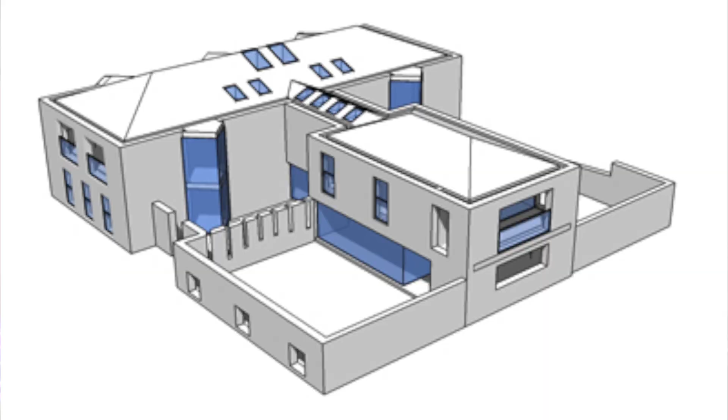I've had several jobs over the years that could have been brilliant if only they'd been built. So why didn't these projects go from the drawing board to the building site? And what can be learned from it? If you are thinking of altering or extending your home or even building a new house, there are some valuable lessons to draw from these projects.

I don't think people want to listen to an architect whining about jobs that never got built, so I'm going to use these projects to give you an insight into how the design and construction process actually works. Each project was different. Some were always going to be difficult, others seemed straightforward, but circumstances changed over time. But in every one of these projects, I had an opportunity to push the boundaries and create a wonderful space for the client and a great advert for my own services.

Now, it's important to keep these two motivations in mind because they are like a chicken and egg. I want to do the best for my clients, but I also want to promote the fact to potential future clients. My business depends on its reputation for creating high-quality projects on challenging sites. Over time, I've built a portfolio of projects which attract new clients looking for something similar, and so the cycle continues. Good work leads to more work.

Think about that if you are considering hiring an architect. If your project has potential to be something special, it can be an extra motivation for that architect. Now, that does not mean they will give you something for nothing. I charge the same fees irrespective of the job's potential for future promotion. You won't get a discount because the design might end up on a magazine cover or win an award.

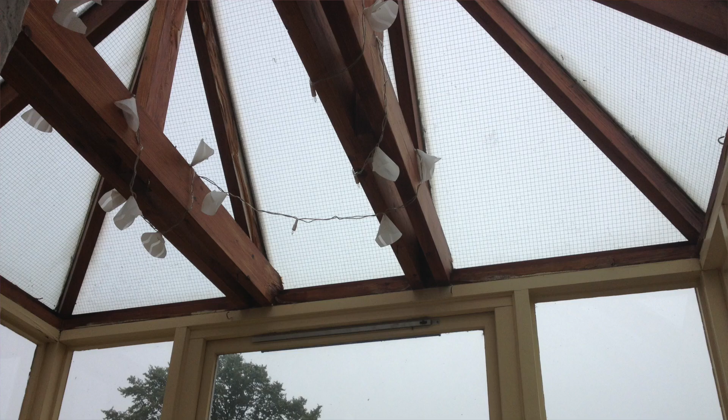Back in 2013, the owner asked me to design a replacement for the dilapidated wooden conservatory, perched on the corner of the house. The conservatory you see in these images is new. Ultimately, the client decided to replace the old conservatory with a design much the same as the original. This is what the original conservatory looks like. It was made from wood, and because the owners couldn't safely or easily access the outside of the wooden frame, it was slowly disintegrating.

The building it was attached to also had some unique issues. First off, it was subdivided between several different neighbours. The lower conservatory and the garage on the street belonged to the property below. The overall structure had been built in several different stages. You can see 2 types of stone and 4 different types of brick in the overall composition. Because of this, the building has moved over time as the different materials settled at different rates. Many of the walls are no longer true vertical or at right angles. Altering or extending an existing structure like this can be a nightmare.

The thing about unbuilt projects is that the challenges are often apparent right at the outset, and that was true here. I made my client aware of my concerns right from the start, and they understood the issues. So let's look at the design and see how it evolved. The client needed the new design to be large enough to accommodate 8 people at a dining table. It had to be easily maintained externally and preserve views towards Edinburgh Castle.

It also had to provide thermal comfort, not get too hot in the summer or too cold in the winter. So we have size, access to the outside for maintenance, the view, and thermal comfort. That's a lot of things to pack into one small structure.

From the outset, it was apparent to me that we would probably never be able to meet all the client's expectations, and I told them so. Keep that in mind if you are planning a project. The more requirements you load into the architect's brief, the greater the possibility things will not go as expected. It's best to write your wish list in order of priority and be prepared to compromise.

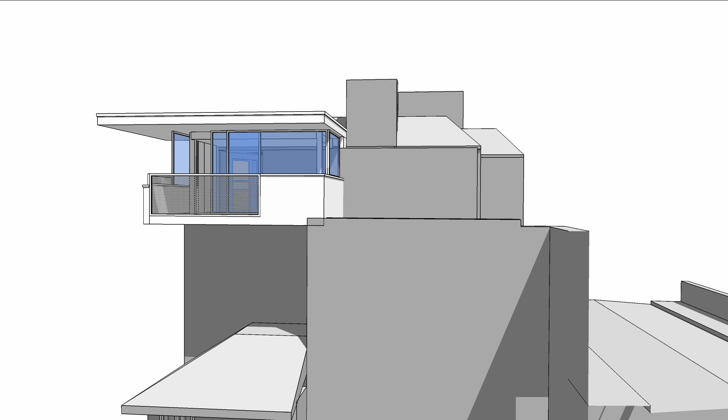This is the first iteration of the design. It's got a balcony on the south side and a smaller one on the north. We plan to cut down the existing window to create a door to access that. The roof is a prominent feature to provide both insulation and shade. The large balcony would allow access to the outside for both the view and maintenance.

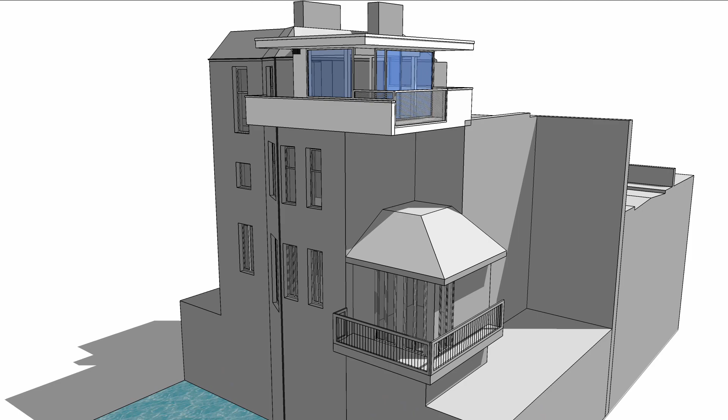You can see the 3D model doesn't have any materials, and that's okay at this stage of the process. We're just testing ideas, but it was apparent to me that whatever we built this from would need to be zero maintenance in areas under the balcony and the cantilever roof.

One thing that came up early in the process was that if the new structure cantilevered over the river, we would need permission to do this. This being Edinburgh, we had learned that the riverbed was privately owned, and Scots law has long-standing provisions for air rights above private property. The client spoke to their lawyers about this and were advised that we could resolve the issue by negotiation. A new block of flats just upstream had balconies over the river, so it must be possible.

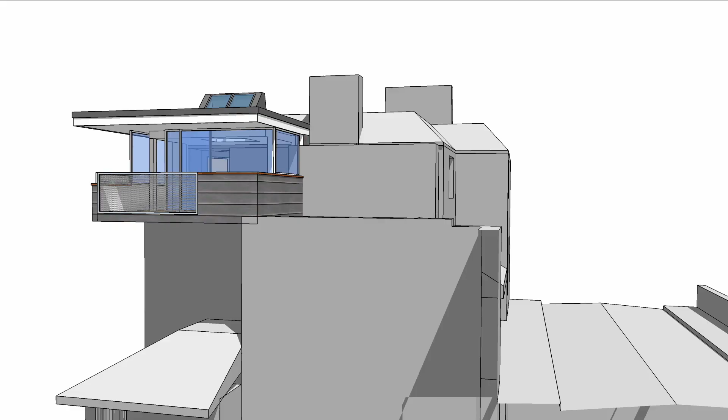The next iteration of the design shows how I began thinking about materials. I suggested zinc cladding for the outer face of the balcony and a stainless steel mesh for the balustrade. The design now includes an angled skylight because the client wanted somewhere to place his telescope. The box and skylight are an off-the-shelf item made specially for flat roofs. I also considered using more stainless steel mesh on the underside of the balcony, both to give it a surface worth looking at, but also because that material is maintenance-free.

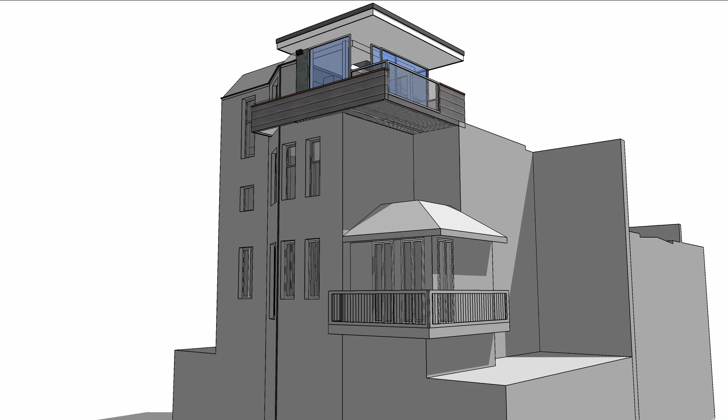The client liked many of these elements and could see the rationale behind the layout and the materials, but they were still not convinced. This is normal in the design process. You never build the first thing you draw. It takes time to work out the complexity and contradictions inherent in any building. Keep that in mind when working out the design of your next project.

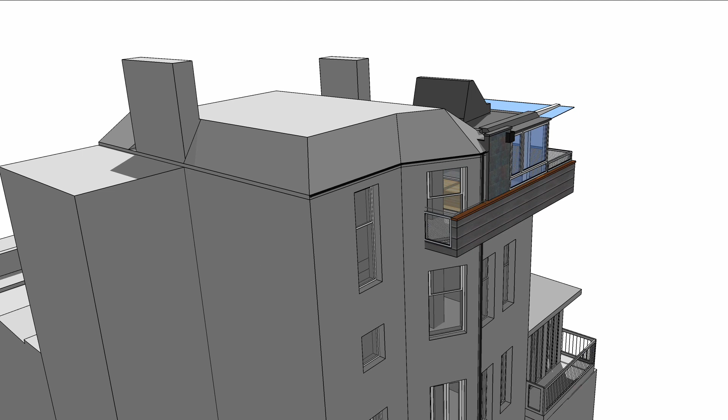Ultimately, my client wanted to increase the amount of daylight into the conservatory. I made the overhanging roof out of glass for this iteration, and I made the windows larger. I don't think anyone was very happy with the glass canopy, so the next iteration got rid of it, and I also introduced a more discreet skylight to the roof. By now, we had pushed this design as far as it could go, and we were still not satisfied. I mean, it looks okay, but there were still unresolved issues.

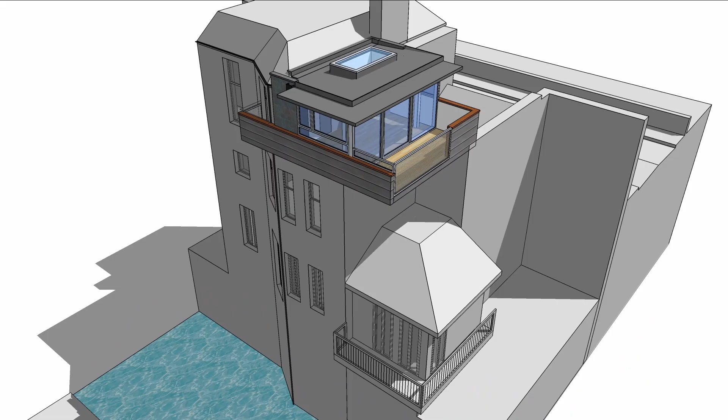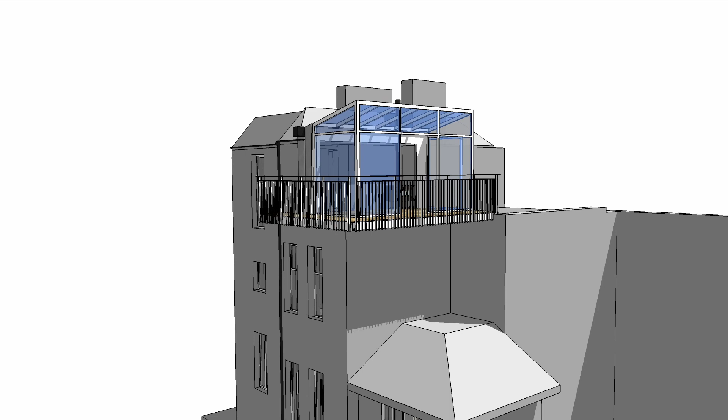The client finally decided they preferred to maximize view over any consideration of thermal comfort. The roof was just getting in the way. The variety of materials was also unnecessarily complex, so the next iteration of the design was radically changed. The roof and walls were now entirely glass with a steel frame. The balcony was smaller; it didn't extend as far around the side of the house anymore. The balustrade would be simplified to reduce costs and increase light.

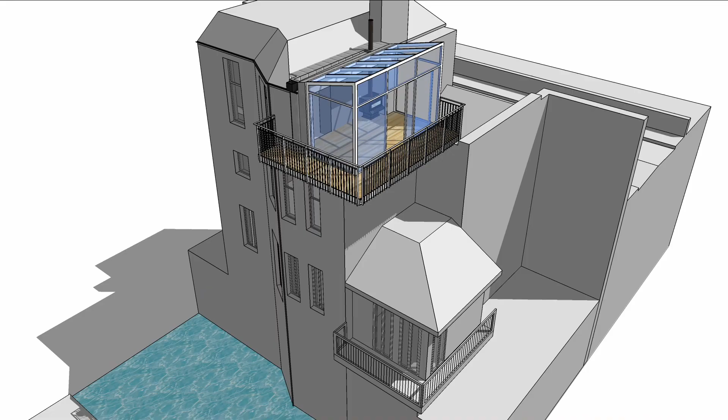I also introduced a zinc-clad section between the existing house and the new conservatory because the walls of the house were not 90 degrees to the new structure, so getting them to meet correctly would be impossible. We could achieve this by forming a timber frame off the existing wall, clad it in zinc, and make sure the outer surface was 90 degrees. The zinc section would also house a stove and be where the gutter would collect rainwater from both the new and old roof. This version of the design was a big step forward, but there was one final iteration.

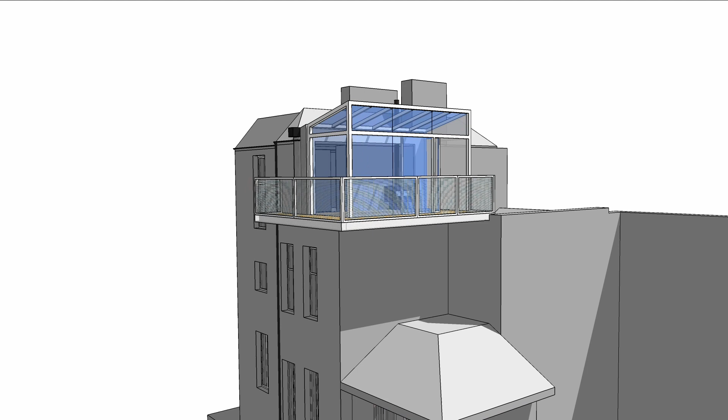We refined the balcony to use stainless steel mesh, and I kept this material on the underside of the balcony so it could be seen from the river footpath below. Now, it's worth pointing out this process played out over several years. I was commissioned by the client in 2013, but we didn't finalize the design until 2017. They often took months between iterations.

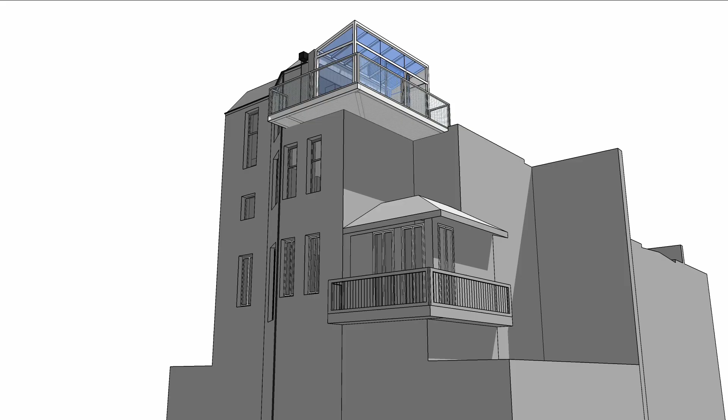Keep that in mind when you are planning a project. Do not rush. Take your time. What does it matter if you need a few extra months to consider a design? The end product will probably be standing for decades. It pays to spend time at the outset getting it right.

I was very happy with this design. It was well proportioned, modern, and minimal. The client was also finally happy and was keen to proceed. I applied for planning permission and crossed my fingers.

Despite the fact the site was very public and the design was daring, there was just one objection from a neighbour and the council approved our application. As far as I was concerned, that was the one unknowable part of the process, and we had succeeded. I honestly thought the planning application stage would be much more challenging, but all I had to do now was get this thing built.

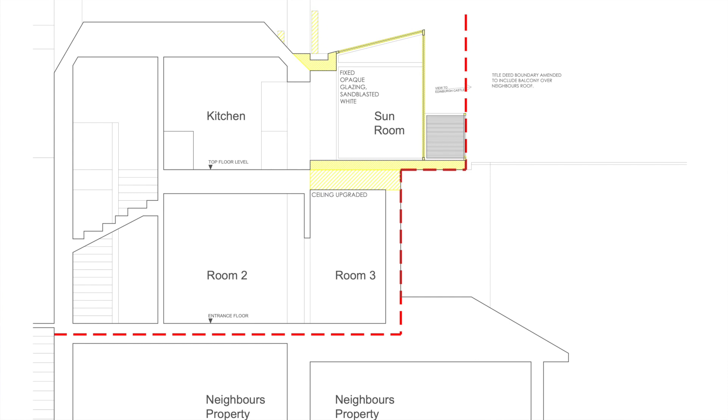You can see from these detailed construction drawings how the sequence of work would play out. The existing wooden conservatory would be carefully taken down, including the brick walls supporting it. There was a bedroom directly underneath the conservatory, and this would have its roof stripped and a new one installed. Our conservatory would span over this roof so that it would not interfere with the existing structure.

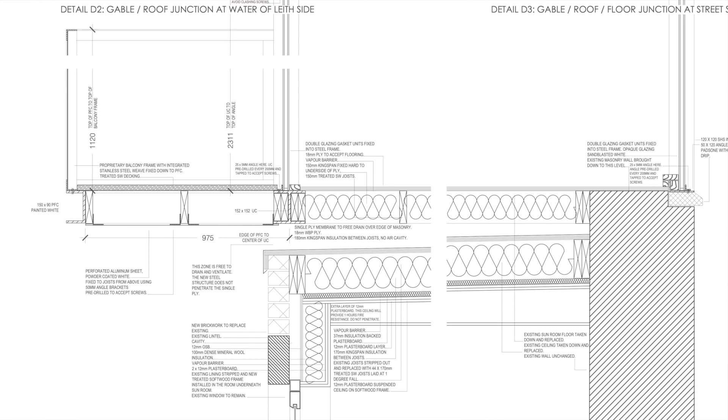The steel frame would have angle sections to support double glazed units, and these would be finished inside using wooden cladding. Fitting glazing directly to steel is more common in large commercial buildings like skyscrapers. For jobs like this, it's more usual to have the glass inside its own frame.